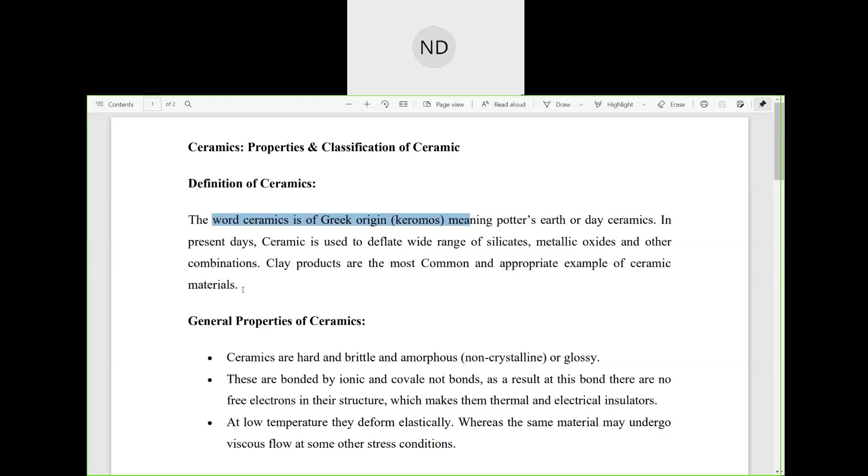In the present day, ceramic is used to define a wide range of silicates, metallic oxides, and other combinations. Clay products are the most common and appropriate example of ceramic materials. So the general properties of these ceramics are what we'll look at - wait, I'll show you what is ceramics.

So the general properties of these ceramics, which is also used for construction works in roofs - you can use this clay type material as a slab or on floors outside your house. Also for different purposes, ceramics are used.

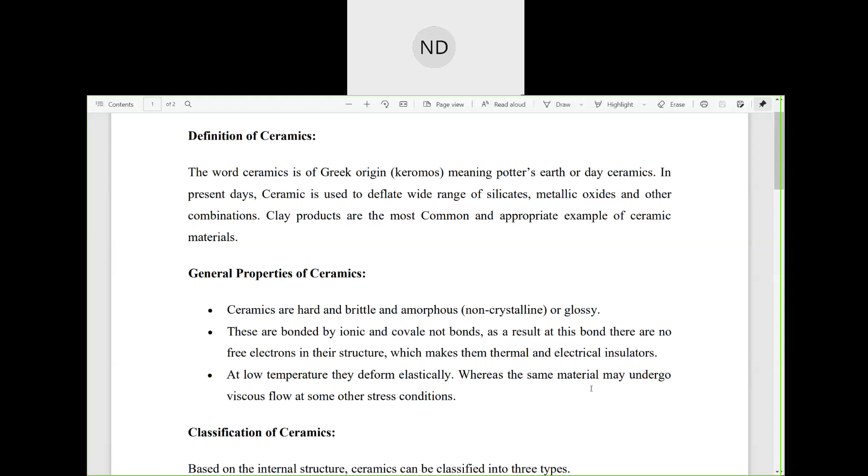Coming to the general properties of ceramics: they are very hard and brittle and amorphous, and also can be glossy. They are bonded by ionic and covalent bonds. As a result of this bond, there are no free electrons in the structure, which makes them thermal and electrical insulators - clay is a very good thermal and electrical insulator. At low temperature, they deform elastically, whereas the same material may undergo viscous flow at some other stress condition.

So these are the different classifications of ceramics. We were talking about the different materials used in civil engineering, so we'll go through them in short, covering all the materials, because otherwise we'll take too much time on one material only, and we have more units to cover.

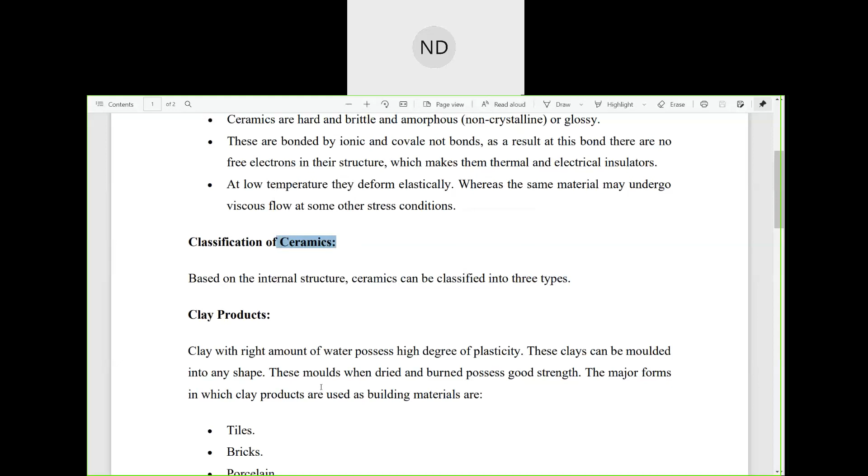These are your different classifications - ceramics can be of three types: clay products, refractories, or glasses. So what are your clay products? The ceramics can be, according to their internal structure, classified as clay products.

Clay with the right amount of water possesses a high degree of plasticity. When we mix clay with water, it gains plasticity so that you can deform it and give it different shapes. Because of their plasticity, these clays can be molded into any shape. These molds, when dried and burned, possess good strength - this can be used on your roofs also.

I'll show you with some pictures. So the major forms in which clay products are used - these can be tiles. I showed you the clay products earlier, I'll show you what that is.

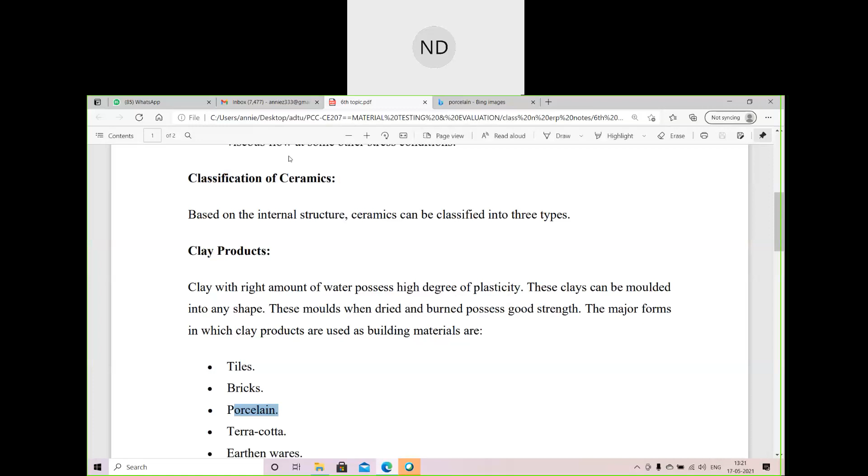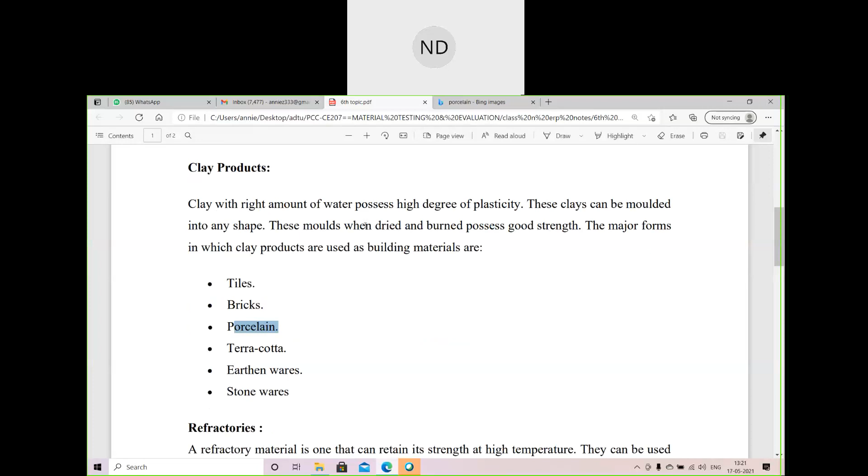Next form is terracotta. Terracotta is actually the same thing as clay, but these are different forms of clay. All of these are made up of clay. Terracotta is also made of clay, but it is baked. You can say terracotta is made of baked earth, where in some statues finishing is not given there, glazing is not there. There are some stuffs, I'll show you, wait.

Actually these are a type of earthenware which is clay based. This can be glazed or unglazed, and their body can also be fired to be porous or something like that.

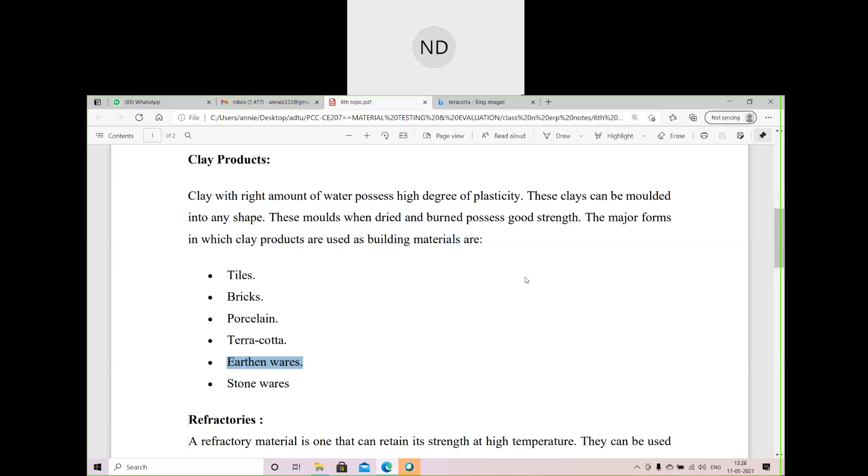Next form is earthenware. Since you have to fire or burn these materials, you have to fire and burn the clay to get these forms. These can be burned below 1200 degrees Celsius. Earthenware means actually the same thing, these can make your terracottas also. These can be used for absorbing water, or can also be made impervious, like using different kinds of materials in earthenware we can make them impervious to liquids by giving them a coating, using ceramic glazes.

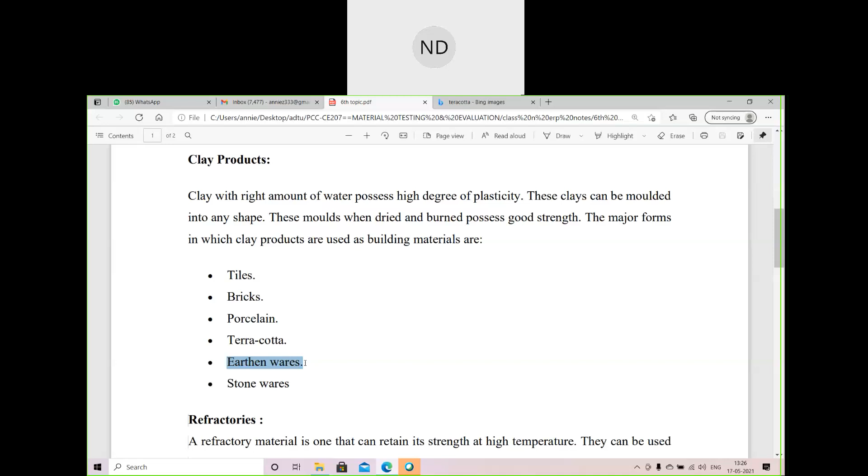Then stonewares are also there. Same thing, with the help of stonewares, clays can be formed into stone kind of things where you can use them as terracotta. These were your different forms.

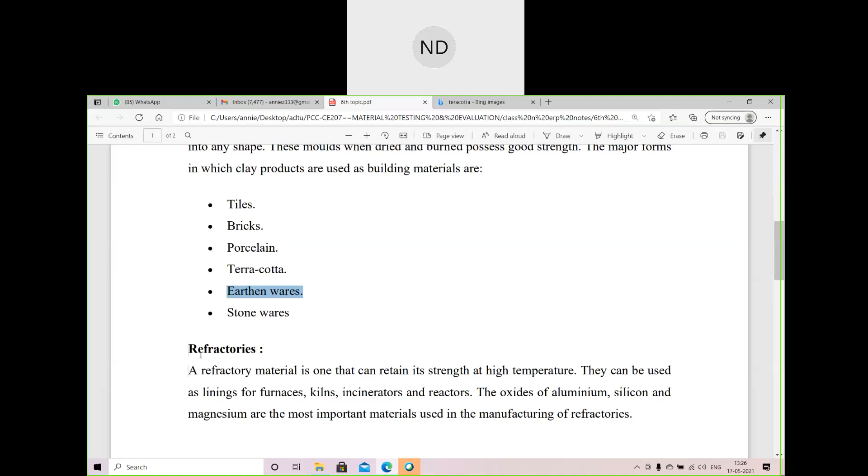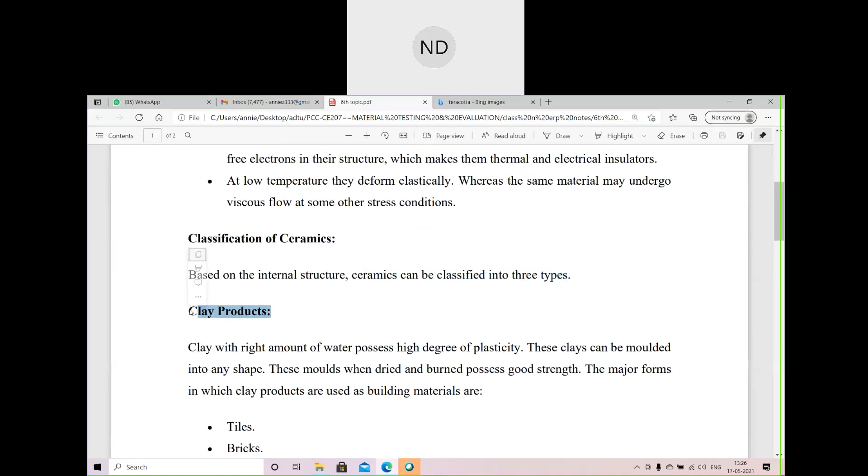So what are refractories? Of the three types of ceramics we were talking about, the first one was clay products from ceramics, then we have refractories. Refractories are a material, a metal that will be resistant to decomposition by heat.

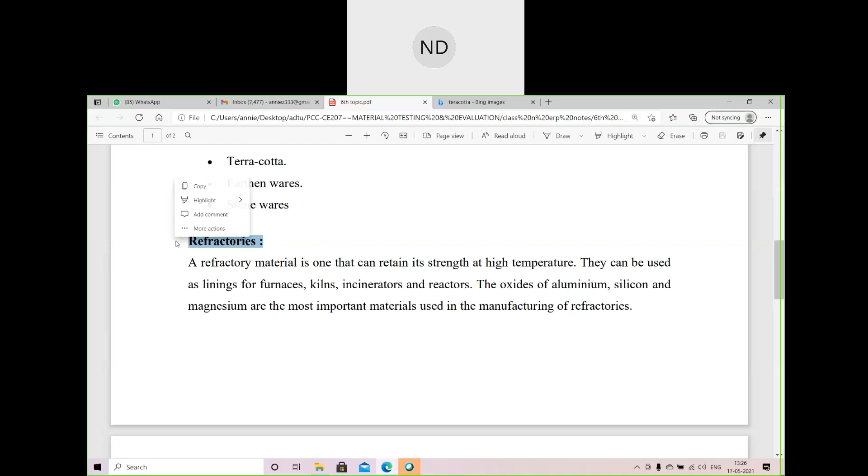Refractory materials cannot get decomposed by heat, pressure, or any chemical attacks, but they can retain their strength and form at high temperatures. A refractory material is one that can retain its strength at high temperature. They can be used as linings for furnaces. So what is the use of this refractory?

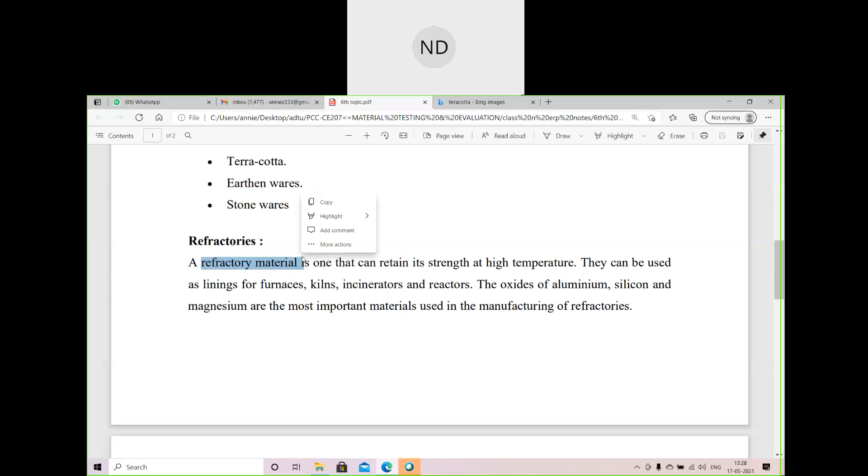These refractory materials are resistant to decomposition by heat, since they cannot be affected at very high temperatures or pressures or any chemical attacks. These materials, these refractories, can be used in your furnaces, because in furnaces we burn things at very very high temperatures. Those structures are under very high temperatures, so we can use refractory kind of materials which can withstand too much heat, as well as having very high strength at very high temperature. They do not get affected by chemical attacks also.

So these refractories are used in your furnaces, kilns, incinerators, and reactors, because in these kind of things we use too much heat to produce something, and these refractories are materials which can withstand that much heat. The oxides of aluminium, silicon, and magnesium are the most important materials used in manufacturing of refractories. So these refractories are used in those furnaces, kilns, where we create different materials at very high temperature.

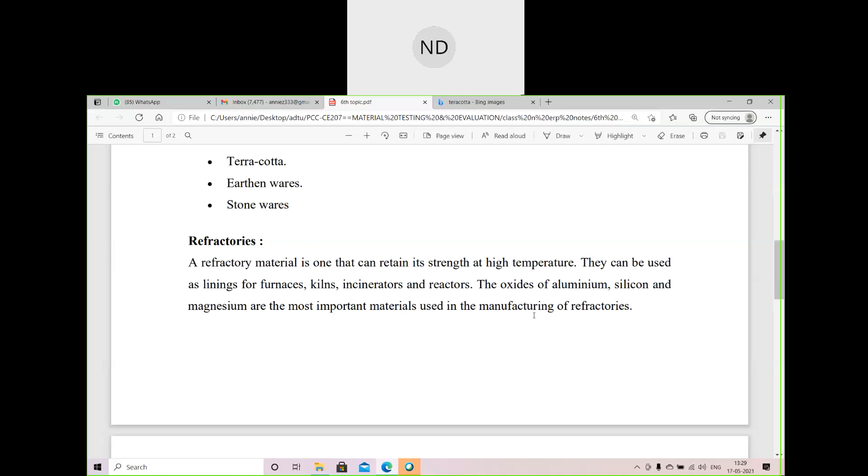But how do you make these refractory materials? They have aluminium, silicon, oxides of aluminium, silicon, and magnesium used in manufacturing this refractory material. So this was one of your ceramics, one type of ceramic.

The next type of ceramic is your glass. This ceramic is not a simple compound but a combination of several compounds. A glass is made up of different types of compounds. That's why it shines, which you can see when glasses break or broken glasses.

So these are, because they are made up of different compounds, different combinations of compounds. It is a mixture of a number of metallic silicates. It is amorphous, transparent, and translucent. These are the properties.

So these are, as I was telling, amorphous, transparent, or translucent. It can be defined as a solidified, supercooled solution of various metallic silicates having infinite viscosity. This is what glasses are: cooled after heating, when melting and then mixing with different materials. They are supercooled, a supercooled solution of various metallic silicates, having infinite viscosity.

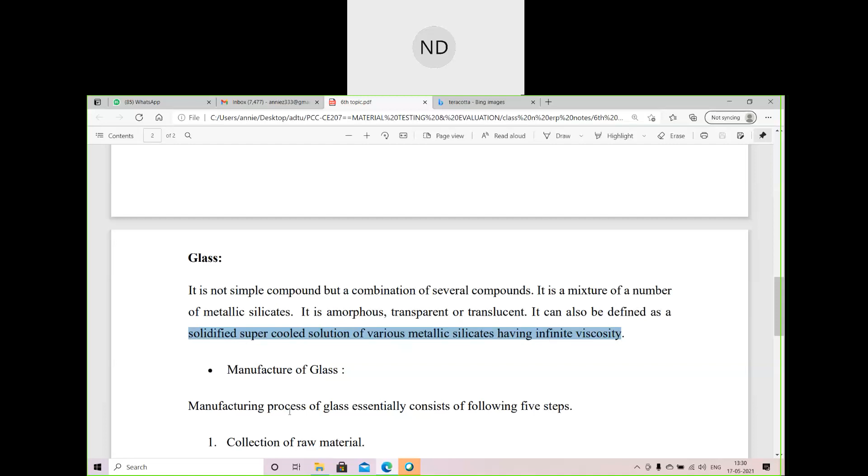Obviously, when you heat the glass, it becomes viscous. Now these are the different steps for manufacturing of glass. We'll not go in details, but the manufacturing process of glass essentially consists of collection of the raw material, then mixing them for different products of glass to form different glass products. Then we melt them.

Suppose you want to mix these compounds together, and then form different bottles or different glasses for your windows, or not only windows, doors also use glasses sometimes. These are nothing but ceramics. This can be formed by collecting the raw material first, then mixing, then melting those mixed materials together, and then we fabricate them and anneal them.

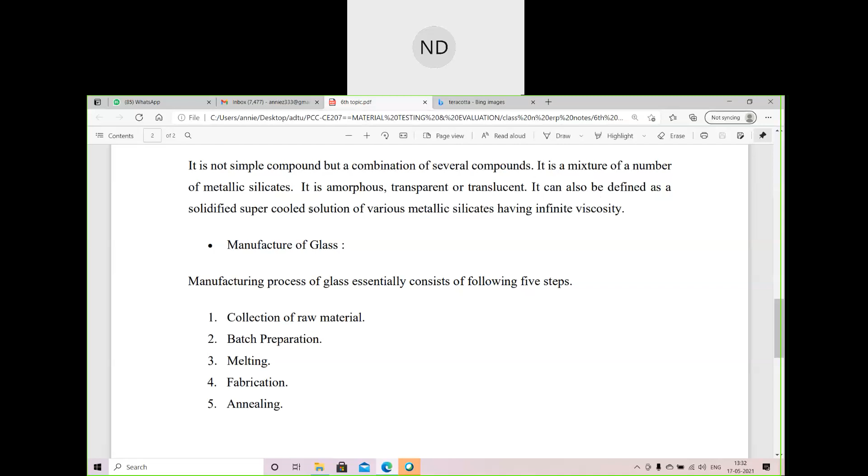That means we give different shapes and sizes, whichever designs we want, the decorative things, and then these glasses are annealed. So all these glasses are made of metallic silicate. There can be different forms for these glasses, but we're not going into details. I can show you a video on the manufacturing of this glass, but not theoretically, because too many materials are there to discuss.

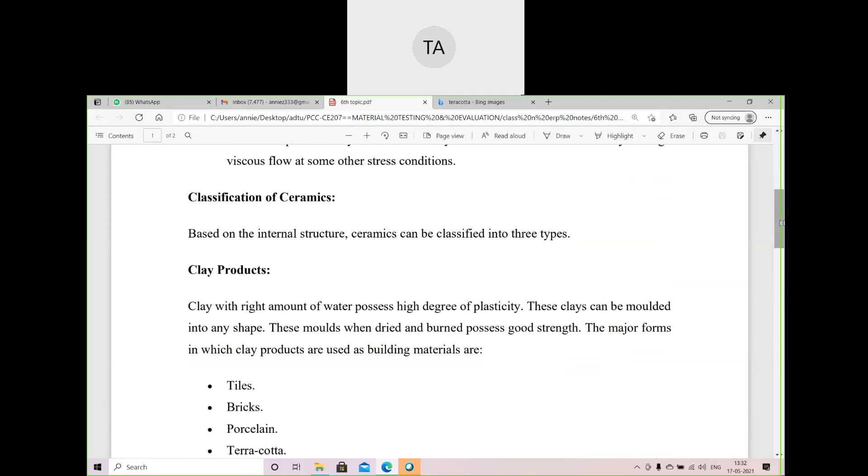So in short, I have just given you these things. We can use different materials for different glasses, but mainly you will have these metallic silicates. There are different metallic silicates, it's not like only one metallic silicate is there.

Actually the most familiar one, if we talk about glasses, it is non-crystalline, often very transparent and amorphous. For rapid cooling, it also depends on the temperature and what kind you want. Some glasses can be volcanic glasses also, which are naturally occurring, but we don't generally use that for our construction purposes. We get the product from the naturally occurring volcanic glass, but we have to convert it so that it can be usable.

We can manufacture those because there are so many glass products. Suppose you have broken some glasses, your windows are broken, or any kind of glass materials are broken, we throw them. What happens to those? They are recycled. How are they recycled? By mixing different materials. Glasses from different sites, different types of glasses are collected, then batched and molded, mixed together, then melted together, and they will form different material, different glass.

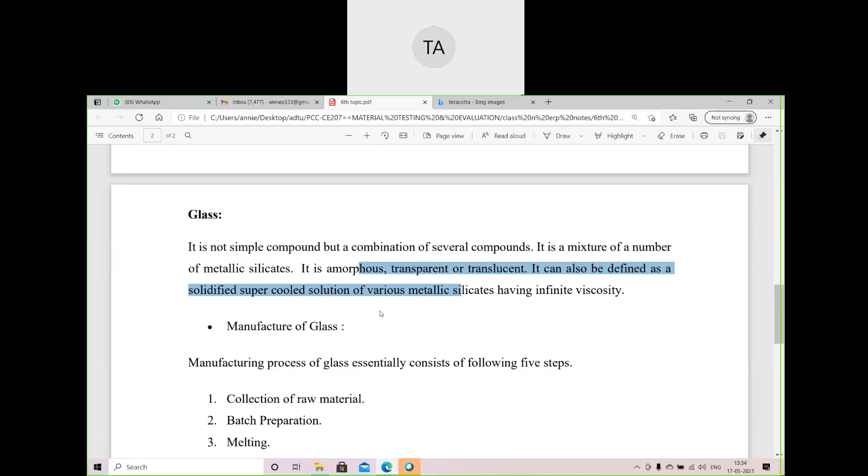Nowadays we see different prices of glasses. The difference depends on the amount of material used inside, because some of them are primary constituents, so sand is also there, used in the mixing. Nowadays soda lime glass is also there, where you will find like 70 to 75% silica.

So the most important thing is silica, but after that what you use, whether it is simply recycled and you don't know the different compounds, based on that your quality will depend. If you use more silicon dioxide, or if your silica is less, your glass may not be of good quality, and based on that your price will also depend.

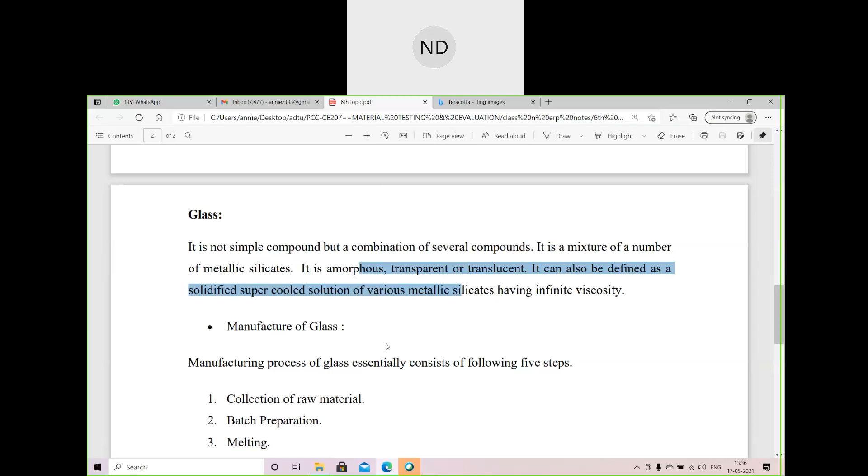Hello. So this was your glass. Now if I show you another one, the different next, let me search where is my sixth. This is sixth to seventh one.

Now the next material we'll be talking about is your bituminous materials. Materials that are bound together with bitumen are called bituminous material. You all know already what bitumen is, because they are a byproduct of petroleum.